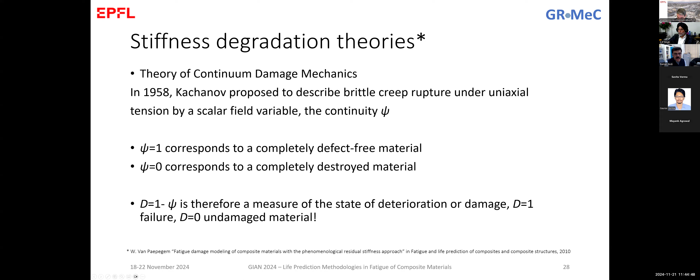This theory has been used later on by Lemaitre to introduce also the elastic properties of the materials in the equations. In this case, we have the stiffness of the undamaged material, E0, and the stiffness of the damaged material. If you see this last equation, it's like the same equation as before, but psi, this function for defining damage, is now replaced by the ratio of the stiffness of the damaged material over the stiffness of the undamaged material. This is what has been used by many researchers.

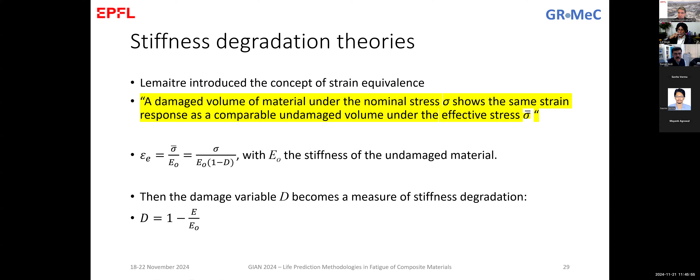Of course, again, changing this relationship to fit better the experimental data by having not a linear relationship, but a relationship that might be exponential on both sides of the linearity. I will explain what I mean by that.

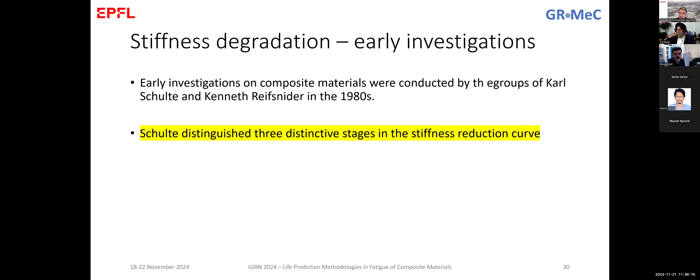Later on in the 1980s, coming now to composites, we had the clear description of the stiffness reduction curve, so the evolution of stiffness with time. It was mainly the group of Karl Schulte that distinguished these three stages. The first stage, you remember, stiffness is dropping quite rapidly, and this was attributed mainly to matrix cracking in the material system.

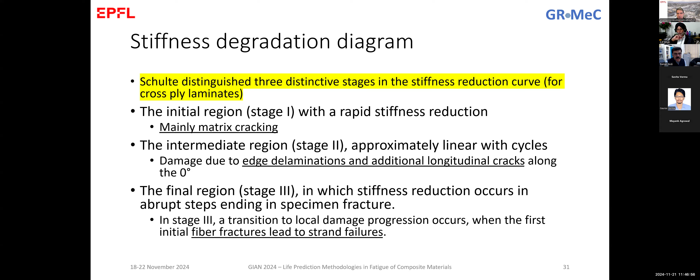Then we have the intermediate region, where we have an approximately linear degradation of stiffness with the loading cycles. And then we have the final stage 3 in the diagram, that is attributed to the final failure of the material.

The benefit of stiffness, and this is why it is appreciated by engineers, is that you can measure it during loading. It's also a measure that can give an assessment for the material performance without having to do any destructive testing. So it's a non-destructive method to follow the progress of the material capacity, and as such it can be used also as a performance criterion for the material.

You can imagine structures that are having rotating parts. Imagine a wind turbine rotor blade that rotates, and due to the damage, the stiffness is reduced, so the blade becomes more flexible. At a certain point, the stiffness reduces so much that the blade hits the tower. So this is, of course, not acceptable.

So instead of talking about failure criteria that are related and constrained only to strength values, so that the material does not fail, we might also assign performance criteria, in this case criteria based on stiffness, that can say, for example, that if the stiffness drops more than 10%, then we assume that the material has failed.

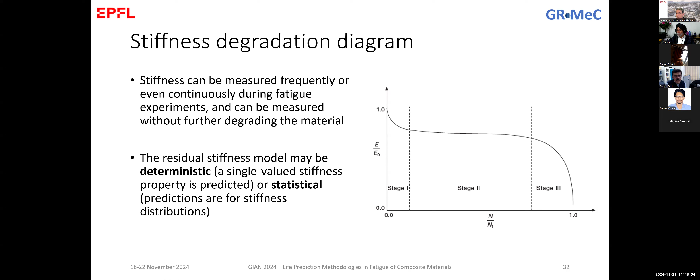These residual stiffness models that we've seen are mainly deterministic, but can also be assigned statistical considerations. Models have been introduced in the past, as we said, based on a critical value like the stiffness degradation. There are a lot of them, I will not go into details, you can easily find all the models that exist.

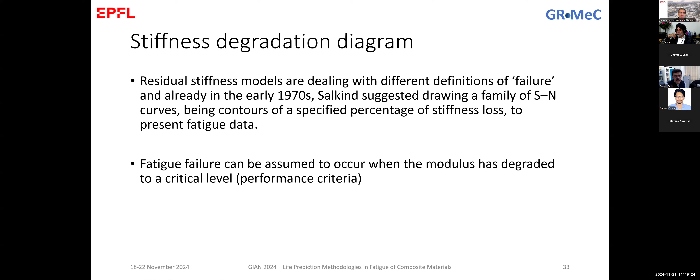Later on in the prediction part of this presentation, we'll see also simple models and how they can be used in this predictive case. So to summarize, stiffness degradation is a very nice

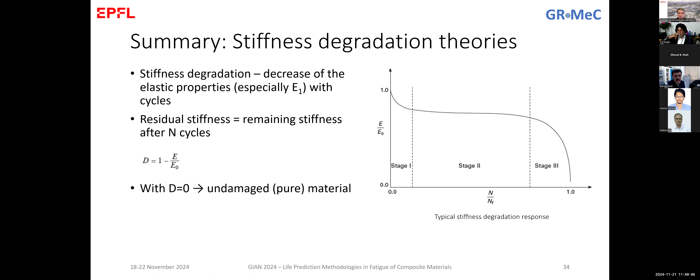measure that can be used during fatigue life non-destructively to assess the material performance. The residual stiffness is calculated by measuring also the strains together with the load and the number of cycles. The simple model or concept behind this is that we have reduction of stiffness, and this is measured by the difference between the initial stiffness and the stiffness at a certain time, over the initial stiffness.

And we define damage in this sense from 0 to 1. So it's a scalar variable that defines if we are close to failure or not. Later on we'll see, I'll just introduce it here.

We discussed this also 2 days ago, that damage can be linear from 0 to 1. If this is life, number of cycles, and this is damage, damage can be linear - this is exactly what we describe by this equation. But damage can be also delayed in the beginning or accelerated in the beginning. This is non-linear damage, and in composite materials we've seen there are a lot of cases where we have non-linear damage and not this linear damage development.

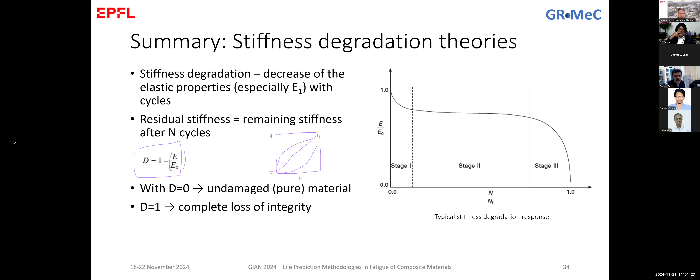This is discussed in the literature quite widely. That's why you will see also in the literature models that do not assign damage to a linear relationship between these two, but there are equations that have polynomial or exponential relationships between the two stiffness values that are used.

Stiffness degradation theories in reality are applied broadly, independent of the material. They're based on measuring stiffness, which can be measured by measuring the slope of the cycle, the hysteresis loop area. So the slope drops, and this defines the stiffness drop.

And also the area is the damage. As we've seen in the previous lecture from Professor Bedi, we can also estimate the creep. But if we only stick to the damage, so the stiffness drop, we can plot this.

These are values, and you see also the scatter of these measurements. These are values from six independent specimens at different stress levels. Remember the discussion we had, that the stiffness drops more when the stress is lower. That's why we see these black dots, for example.

And it is less for higher stress levels. And this is a trend that is more or less followed by all the specimens and all the materials that we have investigated.

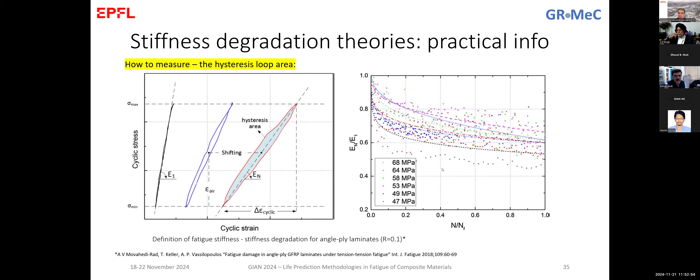I'm showing measurements, and in this case I come back to the measurements we've seen yesterday for the adhesive material. And there is exactly the effect of the conditioning of the material, or the conditions of the testing or of the operation of the structure.

But in some cases, as we've seen also yesterday, we might have stiffness that is increasing instead of decreasing. This can be due to post-curing, in this case due to additional curing of the material with time; in other cases, due to the alignment of fibers in the system, which we've seen for plus minus 45 degrees.

This is actually a validation of the argument we had at the beginning of these lectures, that composites follow specific trends. For stiffness degradation, we expect this sigmoid drop of the stiffness, but there are cases where we should be more careful when assigning values to stiffness degradation, because there are specific peculiarities of the materials that suggest the behavior might be different than this.

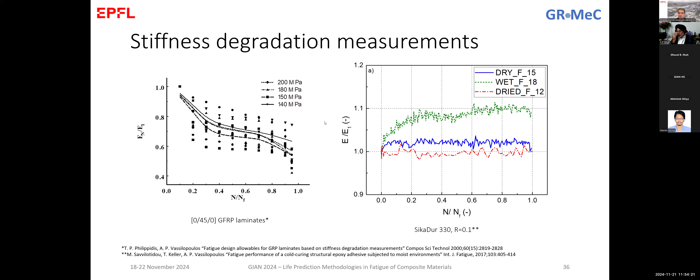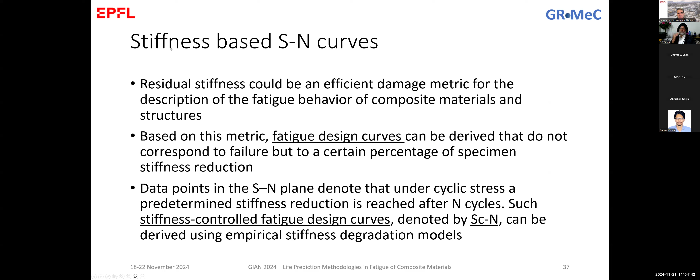So based on stiffness, as you remember, we mentioned that we can define design allowables, if you like, that do not correspond to failure but correspond to specific stiffness degradation. This is how we defined once these stiffness-based SN curves.

They were introduced initially by Salkind 30, 40 years ago, but we also developed a model in our group here, assuming or assigning the failure data.

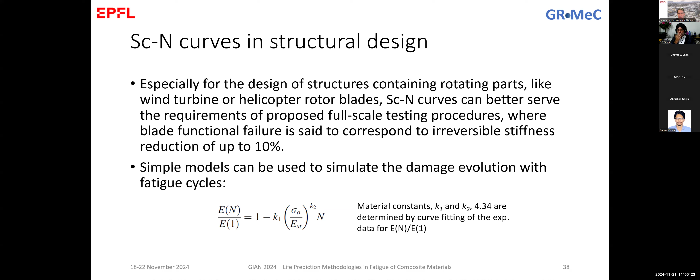So here you have the stress amplitude, you have a number of cycles, and then you see exactly the stiffness degradation, the stiffness at number of cycles n over the initial stiffness of the first cycle. By doing this, you can estimate model parameters, and you can design and show at the end an SN curve, which I will open here and discuss.

So SN curves that correspond to specific stiffness degradation and not to failure. What we see in this diagram is the experimental data. This is again material number one, the first one we extensively discussed yesterday.

And this is the material at 45 degrees off-axis, R equal to 0.1. The SN curves, the 50% reliability SN curve and 95% reliability SN curve for the material, are plotted with this dashed dot line—this line and this line.

And here you see the stiffness-based SN curves for 90% remaining stiffness, meaning 10% stiffness degradation, or 98% remaining stiffness, meaning only 2% stiffness degradation. So the idea here is that we accept—if I try to read this diagram again in a different way—

I accept my material to be in operation only until it loses 2% of the stiffness, which means I'm very conservative in this case. I'm very secure. And this, to my understanding, is correlated to the 95% reliability level curve.

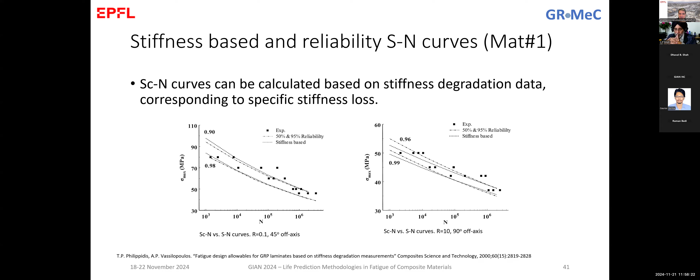We've seen also in other cases for other materials at 45 degrees, 90 degrees, that this correspondence is always valid. So we go briefly to residual strength degradation theories. This residual strength is based on the measurement of the strength of the material after specific numbers of cycles, during the fatigue life.

You can imagine this is a very intensive experimental program, because you have to start testing a specimen, stop the testing before it fails, and do a static strength test. Then at the same stress level, you go back, take another specimen, do the same, and collect remaining strength points. If you do that, you get a curve like this that tells you the degradation of the specimen strength after being loaded at a certain level for a specific number of cycles.

We've seen that this relationship is usually linear. So there is a linear degradation trend, but for many materials, it does not show any indication of degradation. It doesn't actually follow this linear degradation in the sense of monotonic degradation.

It is linear until a point where we have what we call the sudden death. This is one of the reasons these methodologies are not very commonly used, because specifically for materials that are highly anisotropic, they do not give initial indications of failure during the lifetime.

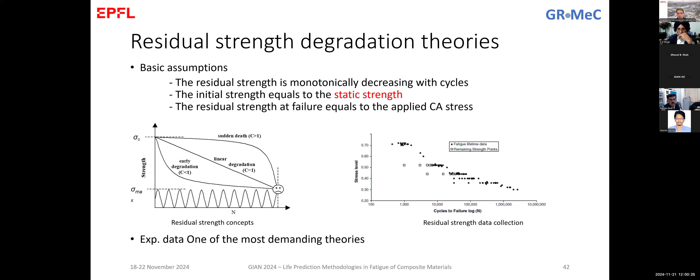Another reason these methods are not very common in practice is that they need a lot of experimental data. I can explain here how we collect these data points, explain exactly the theory.

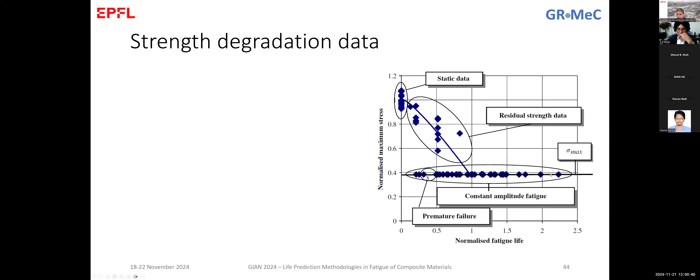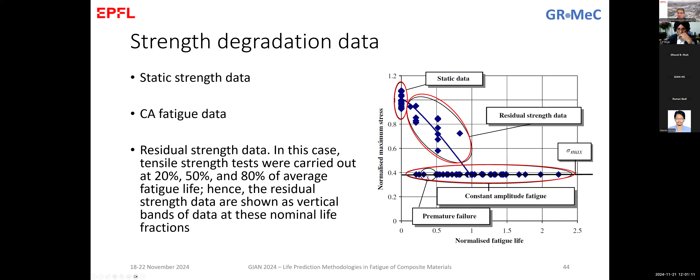We have our experimental data, failure in fatigue. We have the static strength data. We also have the residual strength data, which means that in this case we pick a specimen, start loading it, but do not let it fail. Then we stop the fatigue test and do a residual static strength test, and this is how we collect these points. If we collect these points, we get a line giving us an impression about the residual strength of the material.

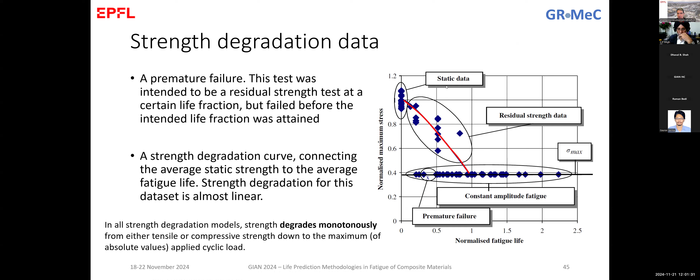These models show, as we said, that in all models there is a monotonous degradation of the strength with lifetime. This is obvious for all of them.

On top of the methods we discussed before, we have the fracture mechanics theories that follow the development of a crack. In metals, there is only one crack that propagates. In composites, if you talk about composite laminates, we have a lot of different cracks associated with the energy that is released by the specimen, or on the other hand, the energy that we impose on the specimen to damage it.

So the idea is to follow the crack propagation and have specific theoretical models that allow the extrapolation or interpretation of these experimental results, to give equations like curves similar to the SN curves, but that do not correspond to number of cycles and load. Instead, they attribute the rate of crack propagation per cycle as a function of the load. So G is introduced as the strain energy release rate, the energy we need to give the system to propagate the crack a specific distance, as a function of the rate of crack propagation.

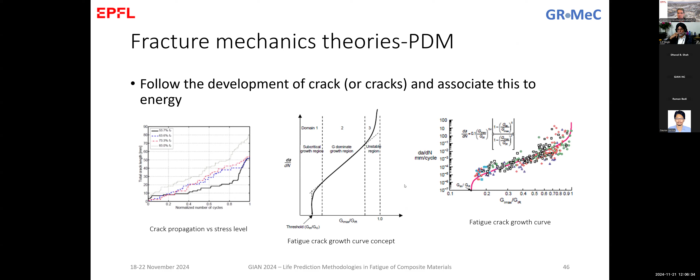So to investigate fracture mechanics, we are testing a lot of fracture mechanics joints, as they are called. I'll just move this because it's a quiz I do for my students, asking if this is mode 1 or mode 2 and so on — but I'll just do it correctly here.

Mode 1 is the opening mode. Mode 2 is the mode where we have shear — imagine we have the two arms, and as we do bending, there is shear between the two arms. Then you can combine these two modes to get the mixed mode experiment, where you open but at the same time press to introduce shear in the system. By changing this arm ratio, you can change the mode mixity, as we call it.

The result of this analysis in static, quasi-static loading, is to estimate the load displacement and then derive the R curve, the curve that gives the value of G, the energy, as a function of the crack. In fatigue loading, it is exactly the FCG curve, the curve we've seen before.

These are the curves we developed in our case for our material, shown here for mode 1 testing at different R ratios. So you see that R ratio plays a role even in fracture mechanics, not only in the typical S-N curve data.

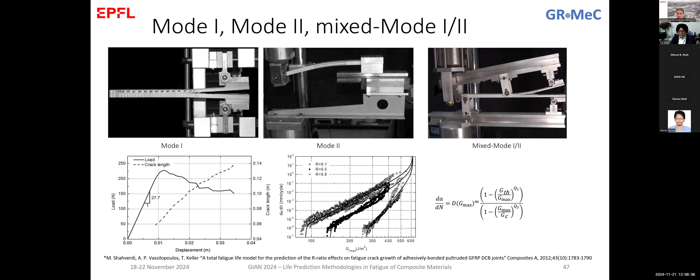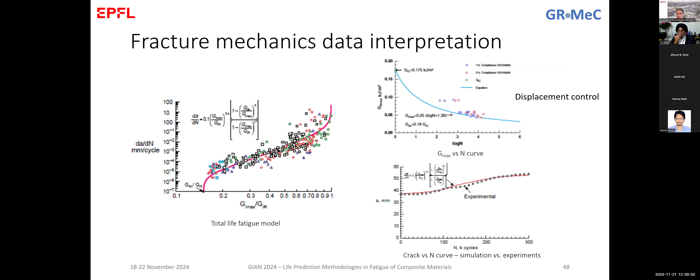We can use these FCG curves to derive or estimate the crack propagation, to estimate when and how a crack propagates, and when it reaches certain points where we think it is critical, we have to stop the test. We have to assume that the failure is already happening.

In fatigue, by doing this type of testing, mode 1, mode 2, and mixed mode, we can also develop mixed mode failure criteria, like the one you see here for static loading, that can also be used in fatigue. In static loading, what we can do is estimate this.

For me, it's a failure criterion that reminds me a lot of the typical criteria used for composite laminates. The Tsai-Wu criterion, for example, is an elliptical equation that goes from sigma 1 to sigma 2. In this case, we have G1 and G2, but again there is a criterion with this elliptical formulation. By having this criteria, we can estimate the G propagation, the energy propagation with crack, in certain joints composed of the same materials as those we've tested in the fracture mechanics joints.

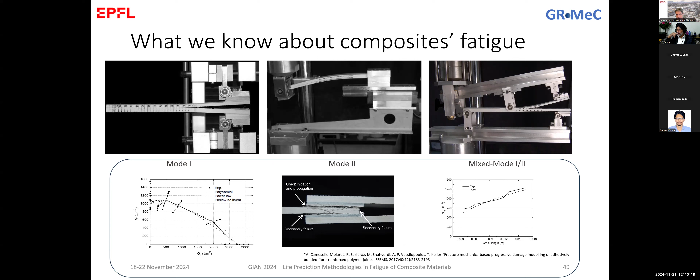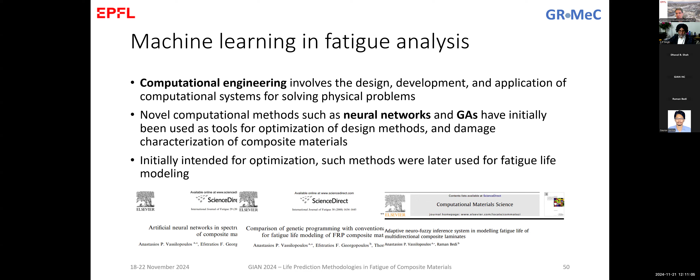I mentioned above that we had a lot of modeling approaches using machine learning tools, and I'll go very briefly on that, starting with this publication back in 2007, where we used neural networks, and then in 2008 we used genetic algorithms to work with modeling of composites. Also in 2008, we have this common publication with Raman applying adaptive neuro-fuzzy inference systems, what we call ANFIS, in modeling fatigue life of composite materials.

All these methods are based on the same theoretical background: they need data in this input layer. Then there is the model where it is trained using the data. So we read the data, try to understand the behavior with the model, and then we have the output layer where initially we output results and validate these results with a specific test data set, part of the data set used for testing.

And then when we have the model which is already defined, we can apply it to new input data from material conditions that we haven't seen, haven't used for the modeling. This is how this model can sometimes be assumed to be a predictive model.

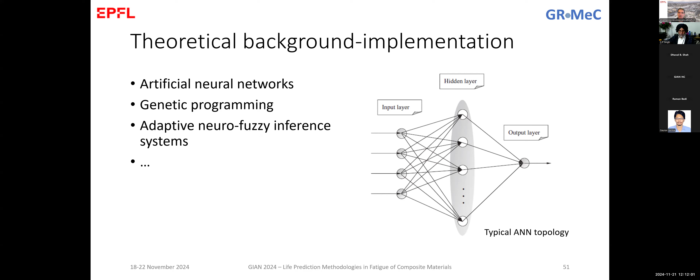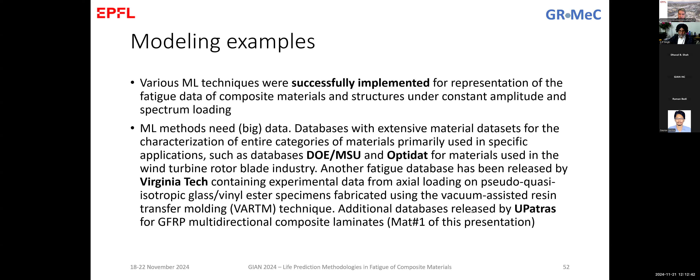For the implementation, we used a lot of data from different databases, like the Department of Energy database that I presented already before, a short report. There is an Optidat database for composite material for wind turbine rotor blades, a big European project. There was also a database from Virginia Tech, and the database that we established at the University of Patras during my PhD years ago.

For these materials, we use data for training, and we've seen that a percentage of 40-50% of the available data set is enough to give a good sample for training the models. We've seen that we could achieve correlation coefficients of more than 90% when we train the data with these percentages.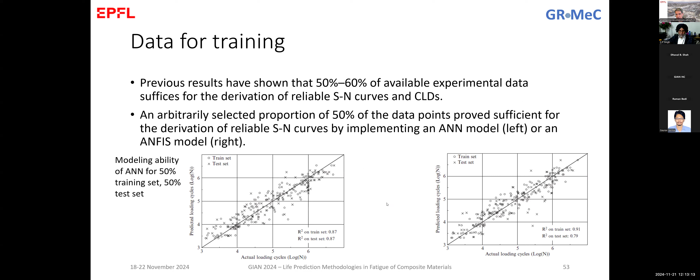And then using these values, we could estimate SN curves for materials without using the entire experimental amount of data. The idea behind this was that we could simulate the fatigue behavior using less experimental data, which means less experimental effort.

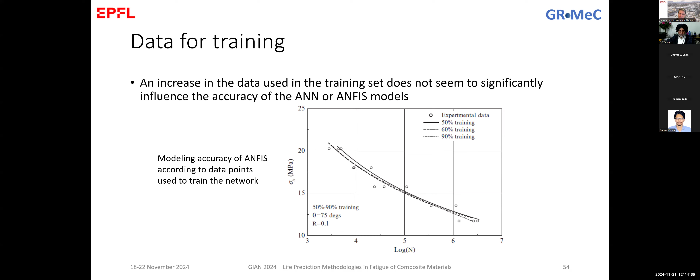If the person that asked yesterday about this 6 specimen testing is still around, this is related exactly to this. The idea is to reduce the data we need to collect in the lab, model the behavior, and then extrapolate to create more data that we can assume are valid for testing. But this validity is based on the type of data we have, and on the variance of this data set. If we have a data set which is very broad, then probably we cannot do a good prediction of this behavior with the tools we're using.

So here I will go through some applications. The first work we did was based on neural networks. We had a data set, then we used these parameters as input, and the output was the number of cycles. I have results showing that it is very accurate to do this modeling of the SN curves using this neural network model, and also we can do a very nice modeling of the CLD using exactly this model.

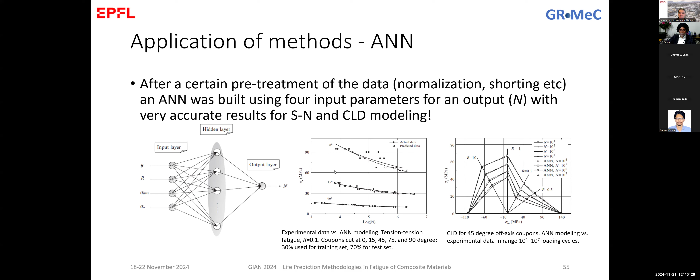We also did the same exercise with ANFIS. This is the publication together with Raman. ANFIS is a bit more complicated than a neural network. It creates linguistic rules between the input parameters and fuzzifies these rules, then by running the model it defuzzifies the rules to estimate number of cycles to failure. We had very good accuracy, even for cases where we only used a very limited amount of experimental data for training. This means you can reduce your efforts in the lab and have nice extrapolations of the SN curves using only limited databases.

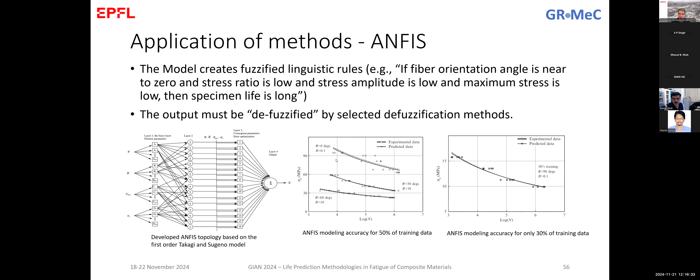So we also did genetic programming. Genetic programming is a quite interesting technique in machine learning because it is based on the principle of reproduction and survival of the fittest. It assumes that only the best combinations of parameters can survive, and the evolution operates on a lot of computer programs that are developed. That's why it's called genetic programming, because it generates programs that can simulate the material behavior.

The representation is in trees, like what you see here. If you want to describe this equation, you go from bottom to top. Here is x plus 3, so x3 and the plus is there. A multiplying 3, so 3 times A, and you have x plus 3 minus 3A, that is given by this. Then you have 2 times pi, so 2 times pi plus all the rest which is there. This is the way genetic programming describes equations in the format of trees.

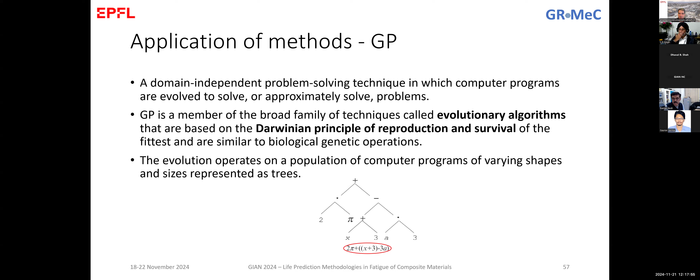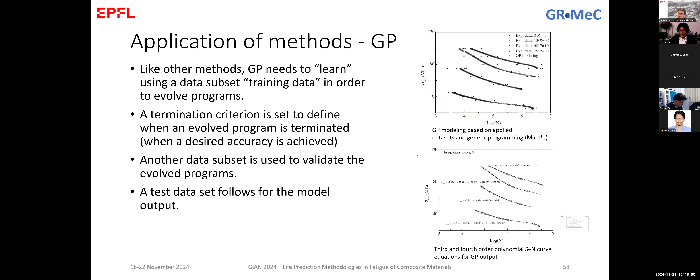Like other methods, genetic programming learns from the data we give as a training set and then evolves a lot of programs to simulate the material behavior. This is what we've seen for different SN curves, that we could simulate the behavior quite accurately. What you see here is the output, these are points, output of the genetic programming. This output does not follow any specific power law curve or whatever. So you can easily fit, or assume that already from the output you have an equation that can be third order, fourth order, whatever is needed to fit exactly this experimental data.

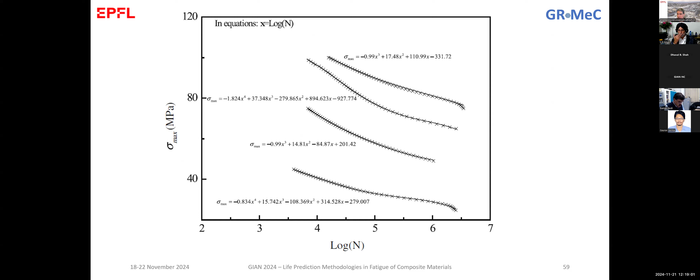So coming back to the point we mentioned before, the best SN curve is the one that fits better your experimental results.

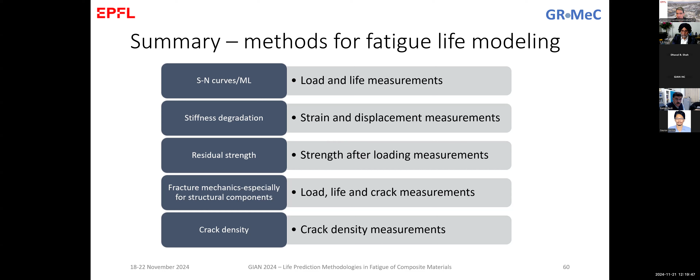The summary for the methods for fatigue life modeling is given in this slide. We discussed SN curves, machine learning for SN curves, stiffness degradation, residual strength theories. We touched a bit on fracture mechanics of joints. We didn't talk about crack density because it's related to fracture mechanics, the idea of following the crack while it is happening. We explained the complexity of each method and the usefulness of each one. In the next slides we'll go to predictive modeling, discussing how we use these methods to predict the behavior of the material in the long term.

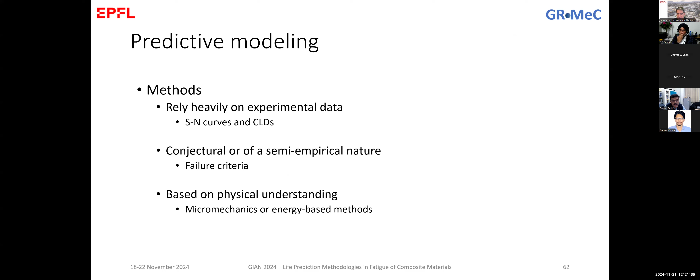For me, all of them are more or less empirical, because even those methods that are based on physical understanding, they might develop the method itself based on physical understanding, but at the end, for the application of the method, you always need to fit a model to experimental data. So fitting this model makes the implementation empirical.

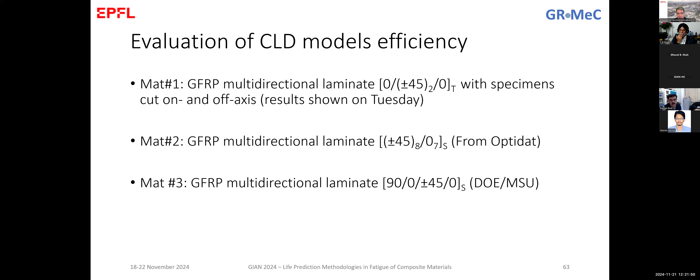So for the evaluation of CLDs, for example, to start with the first, I selected several data sets from material number 1, material number 2, and material number 3 that we've seen also yesterday. And there I have the comparisons. Here I'm showing all the constant life diagram types that we've seen this morning, and how they can be applied for describing this specific material.

And again, here we can start discussing and seeing which diagram is best, which one is not good. We can see also the problems that I mentioned this morning with, for example, the Harris diagram, this one in C. Yes, C is Harris. And you see that depending on how we fit these three different parameters that we mentioned this morning, we can have good results or very bad results. Because you can fit the lines by using linear interpolation, or by using power law interpolations, and there you have much differences.

The same happens with this E, the diagram by Boerstra, where we see that there is a big difference depending on the method that we used for the application of the model.

So going back to the discussion, comparison of the models is based also on the necessity of data, how much data we need to develop the model itself, because here we talk about prediction. We want to predict material behavior. But if we use the data, for example this is the piecewise linear diagram, I used the data for R equal 10, R equal -1, and 0.1 to develop the model. And then the data that I predict is R equal 0.5. And I can claim here that the prediction is very good.

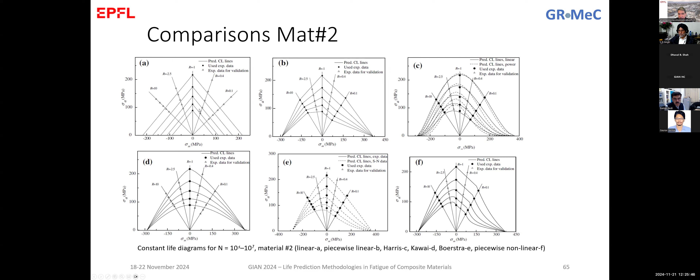So going to material number 2, again the same concept, using 3 SN curves to predict the other 2. Here you see the Harris diagram is much more stable than before. Piecewise linear is always accurate in our cases. The piecewise nonlinear is also accurate. Also Boerstra for this material seems to be stable. Even Kawai, the diagram from Kawai is more or less good, although it tends to overestimate the material behavior. The linear is again not good, as we expect.

And the same for the third material. Again, here I used 5 SN curves and predict 2. The predictions are good for Harris and piecewise linear. Carefully with Harris and the different interpretation of how we use or apply the diagram - here we might have problems. But again, we see that other diagrams are good, others are not good. Kawai here is very poorly accurate. Boerstra is very bad in this case also.

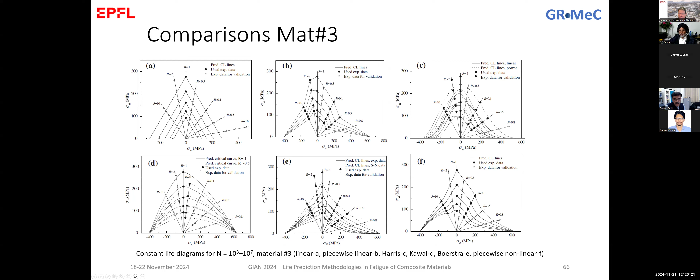So the summary is that we should be careful when we use these methods. We have to select the correct method depending on the material that we are using.

In the previous analysis that I've done, I used only one type of SN curve, and I did the analysis for 50% reliability, so the median, as we call it, SN curve. But of course you can do it by using different SN curves instead of logarithmic - you can use Sendeckyj's model or Whitney's model to fit your experimental results. And of course, you can do it for different reliability levels. Actually, a CLD with different reliability levels would look like that: the solid line is for 50%, and the dashed lines are for 95%.

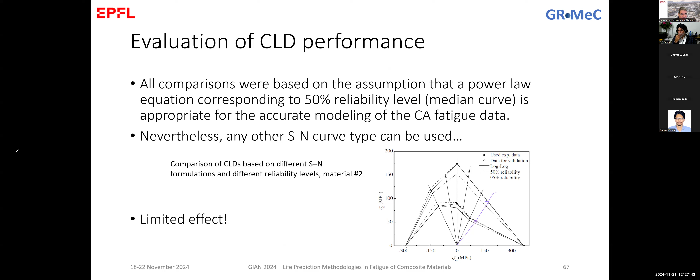When we have the diagrams, the good point is the prediction. As we've seen before, we have a diagram, and we assume it's accurate. Then we can go to a different SN curve and predict this line. Now let's look at the prediction efficiency of the diagrams. I have some results here, again using material system 1.

In the first case, as expected, the linear diagram is very inaccurate. It overestimates the material performance for all cases. The other diagrams are more or less the same, good, except in the Harris diagram when we use linear interpolation, that is very, very low.

In another material system, I think this is 15, the on-axis case. Again, we can see most of the diagrams are quite good, with the piecewise linear and non-linear in all cases being the best ones in these comparisons.

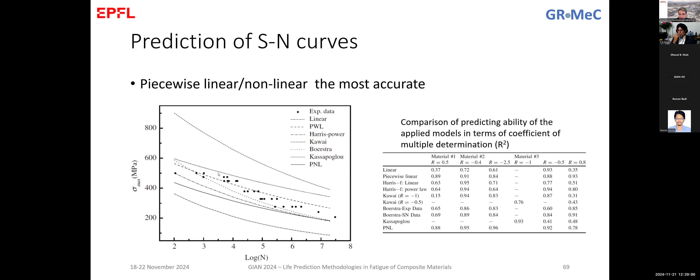So we have another comparison, and I also gave here the coefficient of multiple determination, showing again that piecewise linear is stable and can predict with good accuracy most of the cases that are used.

So the summary for CLDs is that good CLD selection is essential for good fatigue life prediction. All methods involve the problem of mixing data, the same problem we have with the SN curves, either we use the static strength data or not.

There is a problem with accuracy when we approach R equal to 1, the horizontal axis, because there we have an increased creep contribution to the fatigue life, and things are not clear. We are not fully fatigue, not in a clear fatigue region, but in a creep-fatigue region, and we are not certain that the predictions are correct in this case.

So simplicity is offered by some models. You remember we discussed the Kawai model; it needs only one SN curve, but in a lot of cases this is against the accuracy of the models. The more simple the model, the less accurate it is, or in different words, simple models are good for specific cases. Kawai developed his model for unidirectional carbon, and in this case it works.

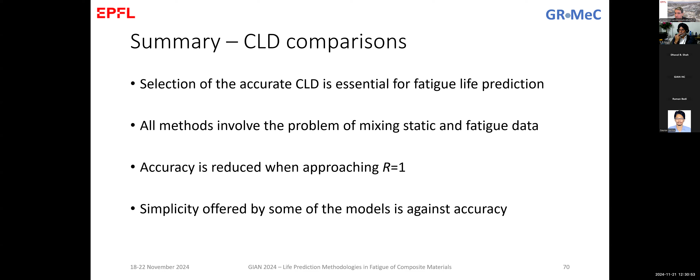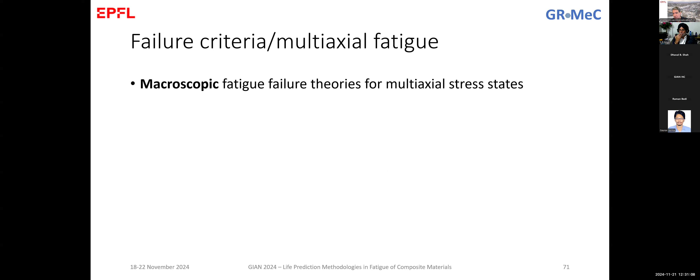So then I will just introduce this. I don't know what is the time yet. Yes, we are approaching the end. So I will introduce the failure criteria, and tomorrow we can go into details to discuss about them.

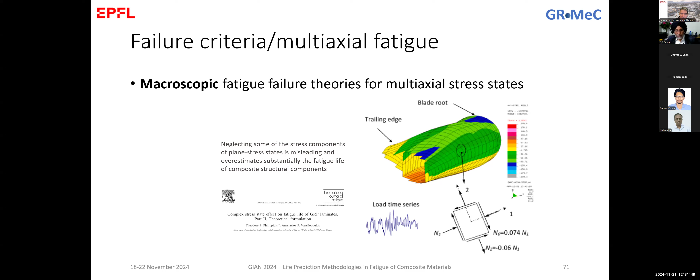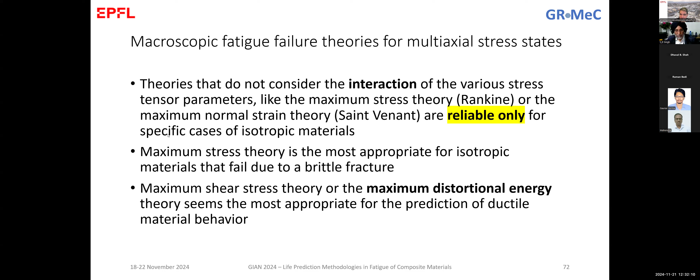As you remember, we discussed on the first day, based on a publication I had in 2002, that for composites, neglecting the three stress components in a plane stress condition and using only the maximum normal stress does not lead to good results. So we know that multi-axial stress states in composites are very significant. This means we have to use macroscopic theories based on the interaction of the various stress tensors, not on maximum stress or maximum shear. Maximum stress and maximum shear are good models for isotropic materials, but are not good for composites.

For composite materials, we usually need to assume a multi-axial failure criterion, taking into account all three components of the applied stresses in the calculations. This is mainly due to the anisotropy of the material, especially when we have highly anisotropic materials. Imagine a carbon unidirectional fabric with very strong properties in the fiber direction, but very low properties transversely to the fibers, which means that even with a very low stress in that direction, you might have failure of the material itself.

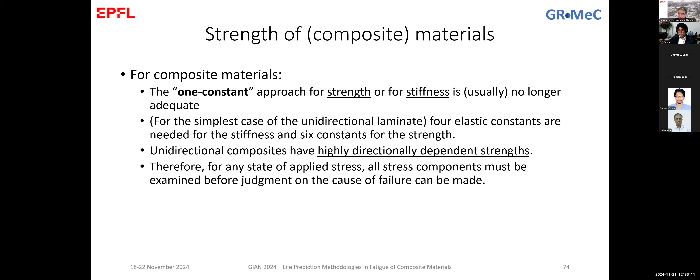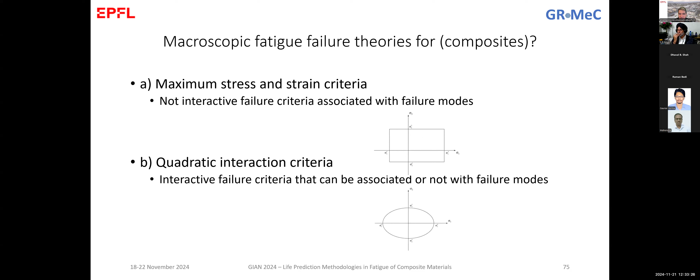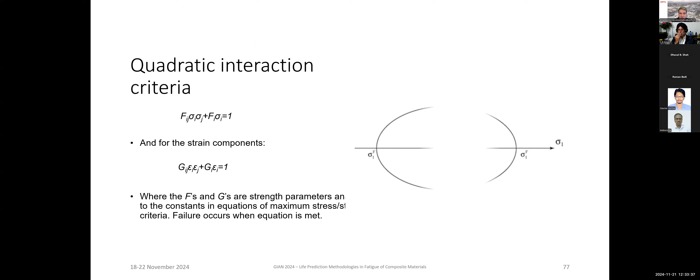Maximum stress criteria like this, that can be attributed to the plane in this rectangular format, are not good for composites. For composites we need to use quadratic interaction failure criteria. How do we know this? This is the explanation of the maximum stress criterion, and this is the explanation of the quadratic failure criterion. How do we know that we need to use quadratic failure criteria?

We know because we have experimental evidence. We've done a lot of testing in biaxial testing, multi-axial testing, and we've seen that the best configuration for simulating this behavior is by using criteria that resemble ellipses. These criteria, as we said, are conjectural. They are not based on any physical background. They're only mathematical expressions that are fitting the experimental results.

They do not give any idea, any information about the failure mode. However, they can give an idea about this. If we see the equations, we'll see later on today or tomorrow probably, in the equations we have terms related to the normal stress, and terms related to the shear stress. At the end we sum up these two to compare to failure.

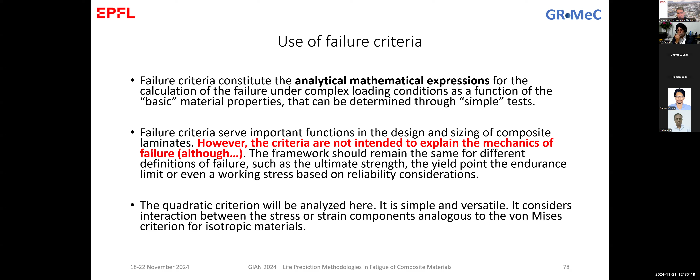So, very qualitatively now I explain. Imagine that one of these is much higher than the other one. It means that the failure mode is related to the term that is giving the higher value. If, for example, the shear term of this equation is much higher, we can assume that the material fails under shear. If the normal component is much higher, then we can assume that the material fails under normal stresses.

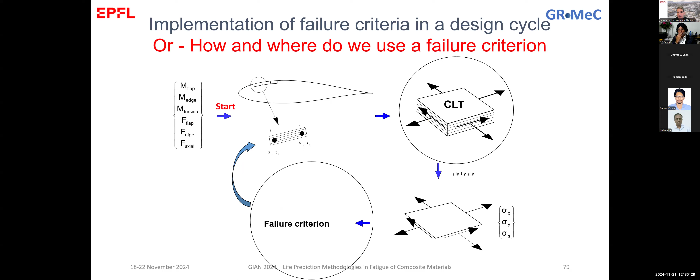So I will stop with this slide, which is a kind of visualization of how we use a failure criterion. Actually, we apply the failure criterion when we have well-defined our stress field. And the failure criterion, we should not forget, is applied at the level of the material that we would like to apply it. What do I mean? We can have a failure criterion that represents the entire structure, but then we need data for the entire structure. We need to test the whole structure and see when it fails, and this is a failure criterion applied to the structure.

If we want to go deeper, and this is usually what we do, we apply the failure criteria at a certain level of the material, so either at a laminate or at a lamina, because there we can analyze the stresses that happen, and it's easier to get experimental results. It's not easy to get complete experimental data sets for a complete structure, because then we need to build a lot of structures, test them in the lab, break them, and get the values we need. But we can do a lot of testing at the lamina level, make specimens at the lamina level, identify the material performance at the lamina level, and build our failure criterion at the lamina level.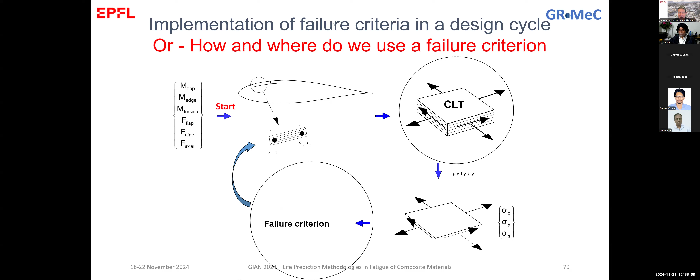We can continue discussing this and see how and which failure criteria we use in composites and fatigue, and how we apply them to estimate fatigue life. I think I can stop here. We are already 8 minutes later than the planned timeline, so I'll stop here, and if you have any questions, you can ask.